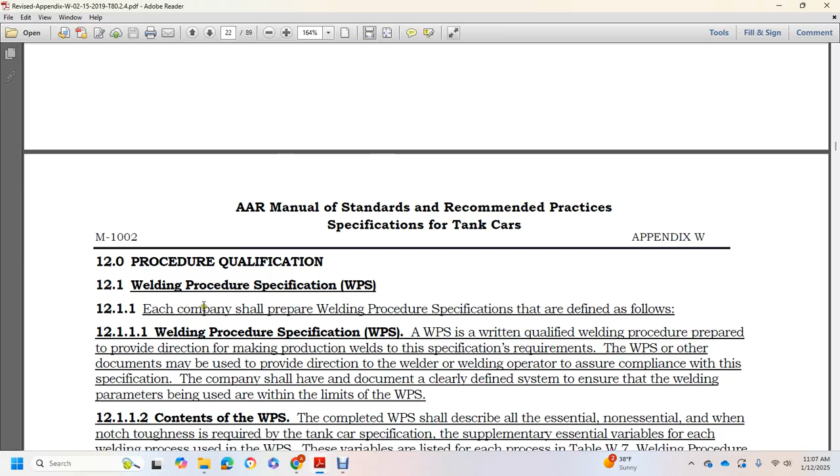AAR manual standard recommended practices specification of the tanker car's Appendix WM1002, procedure qualification, Chapter 12, welding procedure specification. Each company should prepare a welding procedure specification that defines the file for the welding procedure specification, written with a qualified welding procedure prepared to provide direction for production, meeting the specific requirements of the welding procedure specification. These documents may be approved to provide direction to the welding operator to ensure compliance with the specification.

The company should have a clearly defined document system to ensure the welding parameters being used are within the limits of the welding procedure specification. Content of the welding procedure specification: a completed welding procedure specification describes the essential and non-essential variables, with notch toughness required by the tanker car specification, supplementing essential variables for the welding process. The welding procedure specification variables are listed for each process in Table W7.

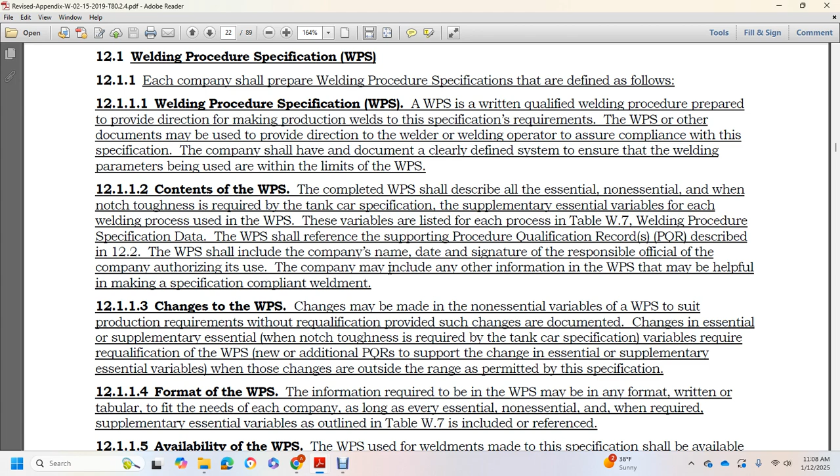The welding procedure specific data and welding procedure specification reference support the proper procedure qualification records described in 12.2. The welding procedure specification should include the company name, date, and signature of the responsible official authorizing its use. The company may include any other information in the welding procedure specification that may be helpful for making specification-compliant weldments.

Change of the welding procedure specification: changes made to the non-essential variables of the welding performance specification suit the production requirement without requalification. Provide a document change with essential and supplemental essential variables, including notch toughness required by the tanker car specification. Variables requiring requalification of the welding procedure specification, additional to the procedure qualification records, should support the change of essential or supplementary essential variables when those change outside the range permitted by the specification.

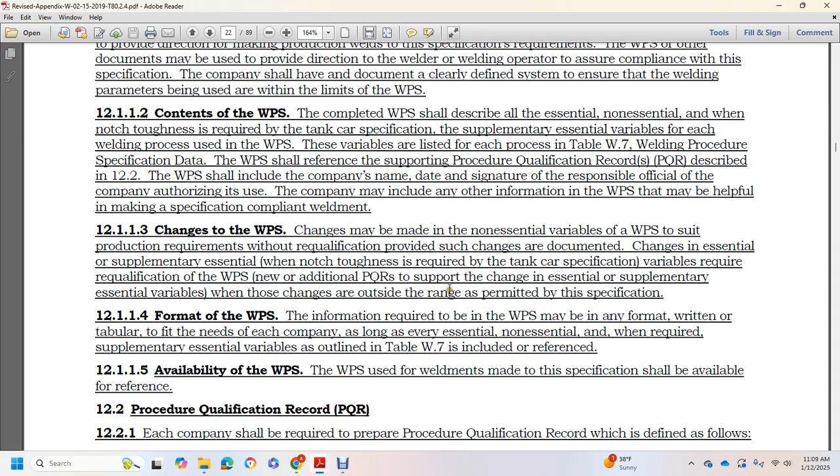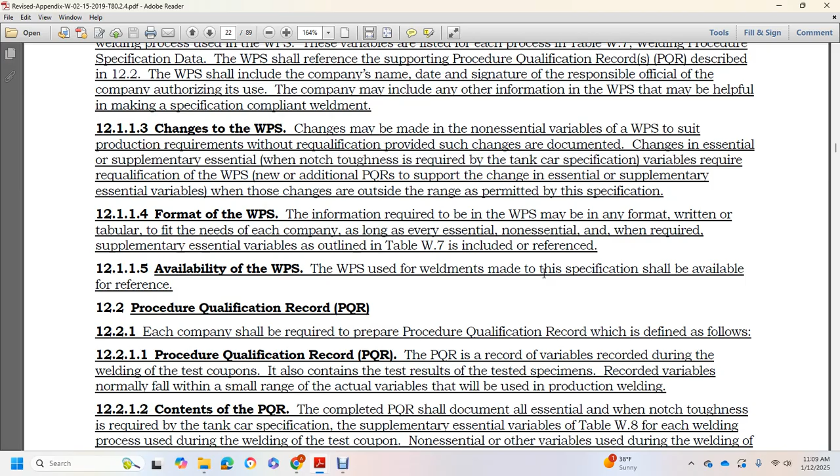Format of the welding procedure specification: information required in the welding procedure specification may be in a format written tabular to the needs of each company, as long as every essential and non-essential, and when required, supplemental essential variable outlined in table W7 is included as a reference. Availability of the welding procedure specification for the weldment made to specification should be available as a performance reference, and the procedure qualification record.

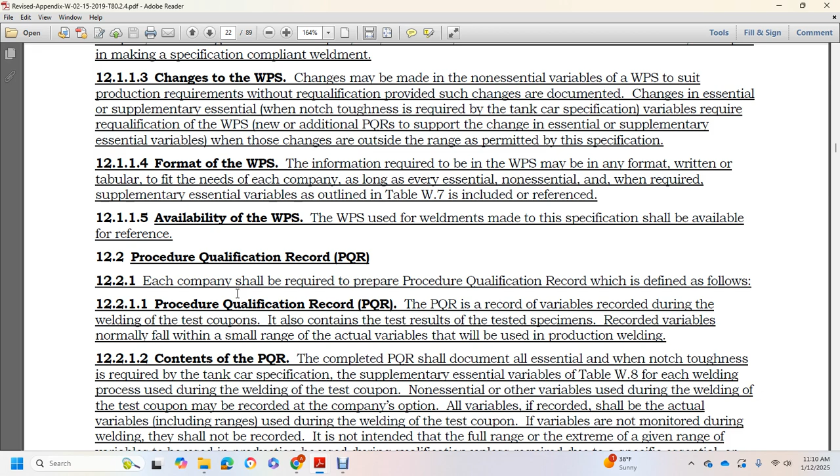Each company should be required to prepare a qualified procedure qualification record as defined and filed with the procedure qualification record. The procedure qualification record is the variables recorded during the welding of the test coupons, containing the test results of the test and specimen. Recorded variables normally fall within a small range of actual variables due to production. Content of the procedure qualification record:

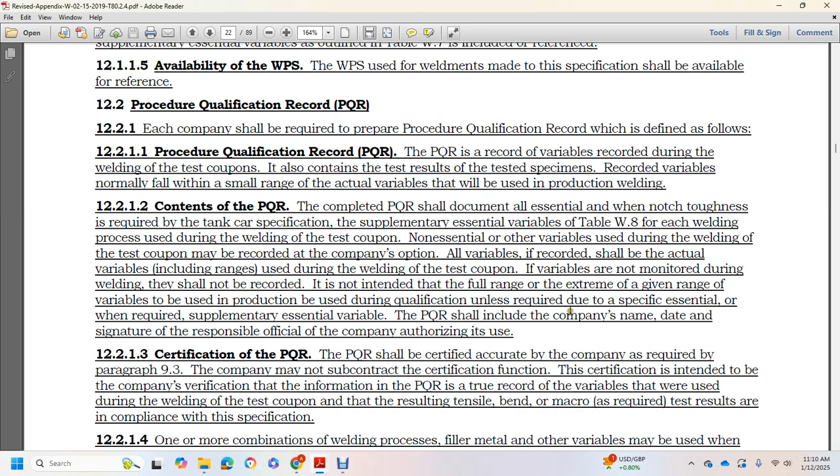The procedure qualification record shall include the company name, date, and signature of the responsible official authorizing its use. Certification of procedure qualification records.

The procedure qualification record accuracy is required by the company per paragraph 9.3; the company may not subcontract the certification function. Certification is intended to be the company's verification that the information in the procedure qualification record is a true record of the variables used during welding of the test coupon, and that resulting tensile, bending, and macro test results, as required, are in compliance with the specification.

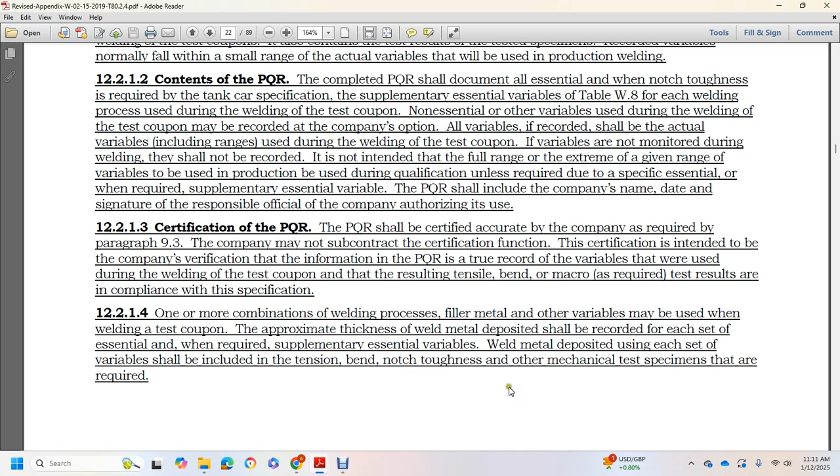One or more combinations of welding process, filler metal, and other variables may be used when welding a test coupon. The approximate thickness of welded metal deposit should be recorded for each set of essential welding variables. Required essential and supplementary essential variables for weld metal deposit, using each set of variables, should include tension, bending, and notch toughness, and other mechanical test specimens as required.

Change of the procedure qualification record. Changes of the procedure qualification record are permitted except as described below. Editorial corrections to the addenda of the procedure qualification record are permitted, except for editorial correction of an incorrect base metal or filler metal number assigned.

As an example, the addendum would be changing the result of a change of specification. For instance, the specification may assign a new F-number to a filler metal, or adopt a new filler metal under an established F-number.

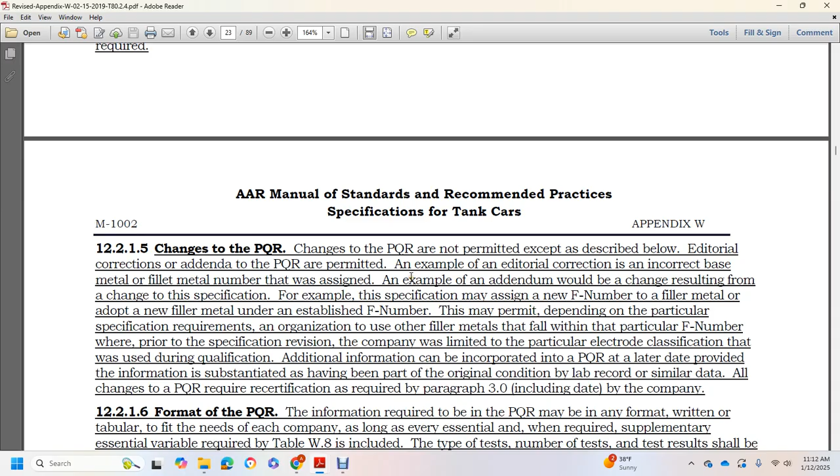This permits, depending on the particular specification requirements of the organization, use of the filler metal within the particular F-number when prior to the specification revision the company was limited to the particular electrode classification used during qualification.

Additional information incorporated into the procedure qualification record later must be verified as having been part of the original qualification record. Similarly, all the procedure qualification records required for recertification, as required in paragraph 3.0, including the date, must be supported.

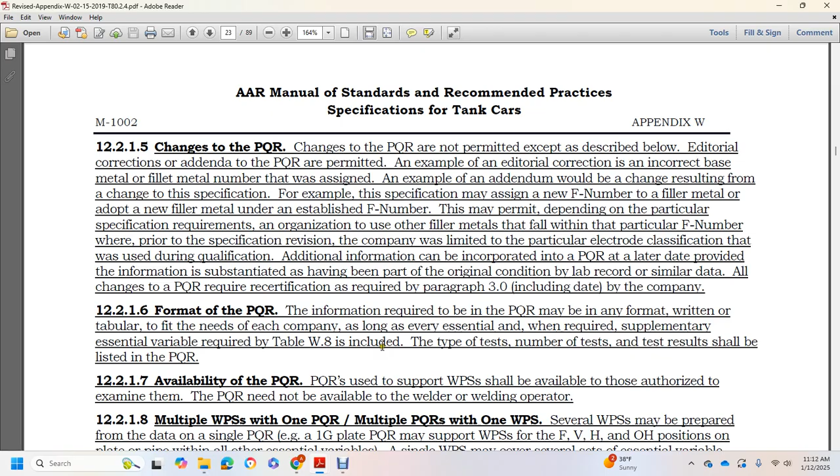The company may format the procedure qualification record information required, written in tabular form to suit the needs of the company, as long as every essential and, when required, supplemental essential variable in the table is included, along with the type of test and the number of test results, which shall be listed in the procedure qualification record.

Availability of the procedure qualification record used to support a welding performance specification must be available to those authorized to examine it. The procedure qualification record need not be available to the welder or welding operator.

Multiple welding performance specifications may be based on one procedure qualification record, and multiple procedure qualifications may support one welding procedure specification. Several welding procedure specifications may be prepared from data for a single procedure qualification record. One 1G plate procedure qualification may support a welding performance specification for flat, vertical, horizontal, and overhead positions on plate and pipe.

This applies along with all the other essential variables. A single welding performance specification may cover a range of essential variables, as long as the supporting procedure qualification record meets each essential, and when required, supplemental essential variable.

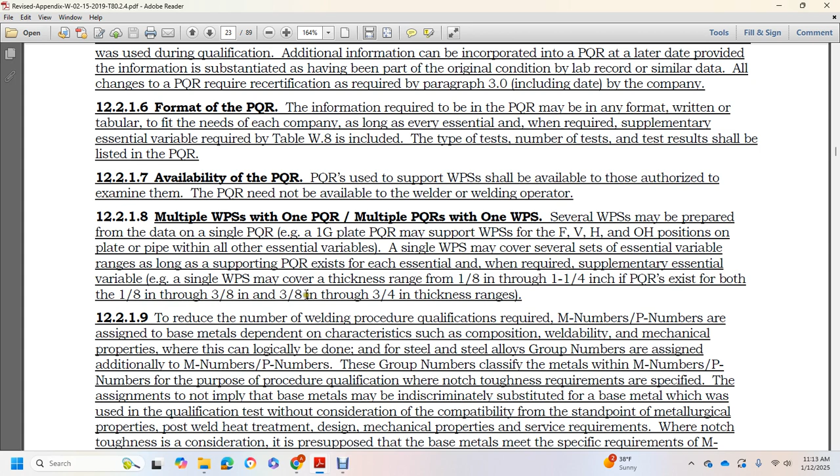A single welding performance specification may cover a thickness range from 1/8 inch to 1 1/4 inch if the procedure qualification record tests for both the 1/8 through 3/8 inch range and the 3/8 inch to 3/4 inch range.

The number of welding procedure qualifications required for the M-numbers and P-numbers are assigned based on the base metal, depending on characteristics such as composition, welding behavior, and mechanical properties, which are logically determined for steel and steel alloys.

Group numbers are assigned in addition to M-numbers and P-numbers. Group numbers classify metals within the M-number and P-number system for the purpose of procedure qualification.

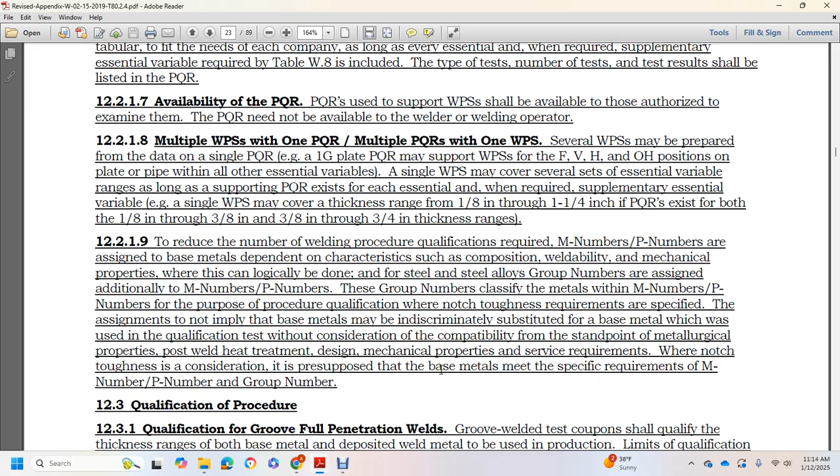Notch toughness requirements specified for these assignments apply to the base material, without indiscriminately substituting base material qualification test results, without consideration of compatibility standpoint, metallurgical properties, post-weld heat treatment, design mechanical properties, and service requirements within the notch toughness consideration, presupposing the base metal meets the specific requirements of the M-number, P-number, or group number for procedure qualification.

Qualification of groove full penetration welds: the groove weld test coupon shall qualify the thickness ranges of the base metal and the deposited weld metal to be used in production.

Limits of qualification shall conform to table W8. Welding performance specification qualification for groove welds should be made with a groove weld test plate using tension and guided bend specimens, and notch toughness testing when required by paragraph 12.3.5.

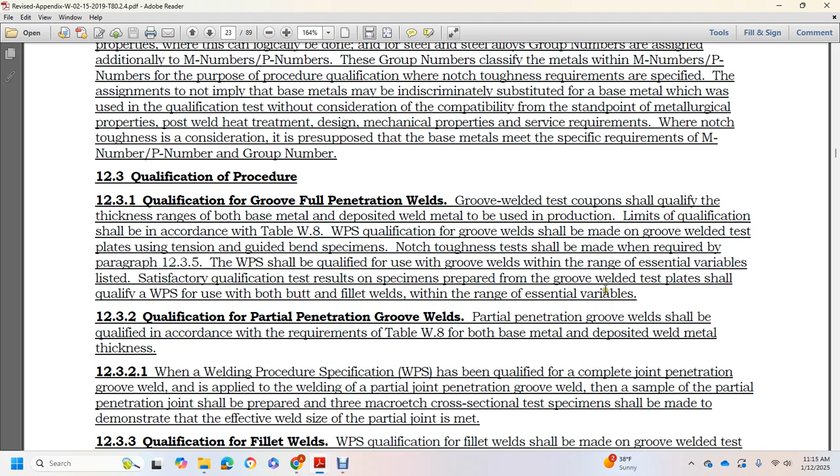Welding performance specifications should be qualified for groove welds with the range of essential variables listed. Satisfactory qualification test specimens prepared from the groove weld test plate shall qualify the welding performance specification for both butt and fillet welds within the range of essential variables.

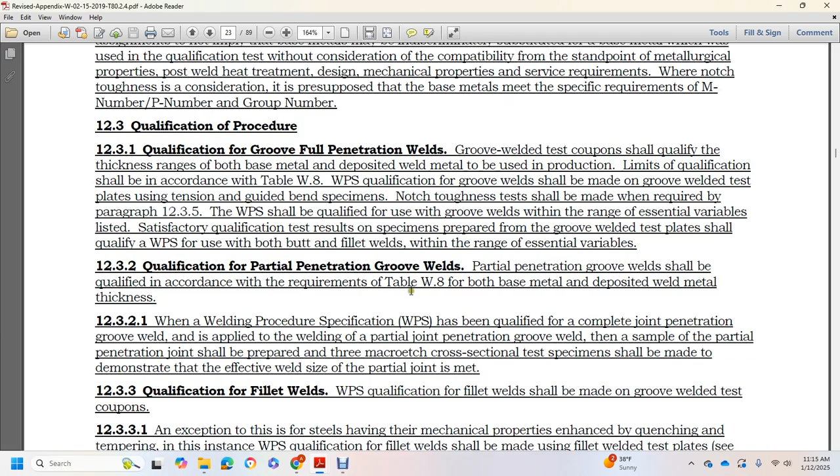Qualification of partial penetration groove welds: partial penetration groove welds shall be qualified in accordance with the requirements of table W8, based on the base metal and deposited weld metal thickness.

Per 12.3.2.1, a welding performance specification qualified for complete joint penetration groove welds may be applied to partial penetration groove welds. For the same partial penetration joint, three macro-etch cross-sectional test specimens should be made to demonstrate the effective weld size of the partial joint.

Qualification of fillet welds: welding performance specification qualification for fillet welds should be made using a groove weld test coupon, with exemption for steels having mechanical properties enhanced by quenching and tempering.

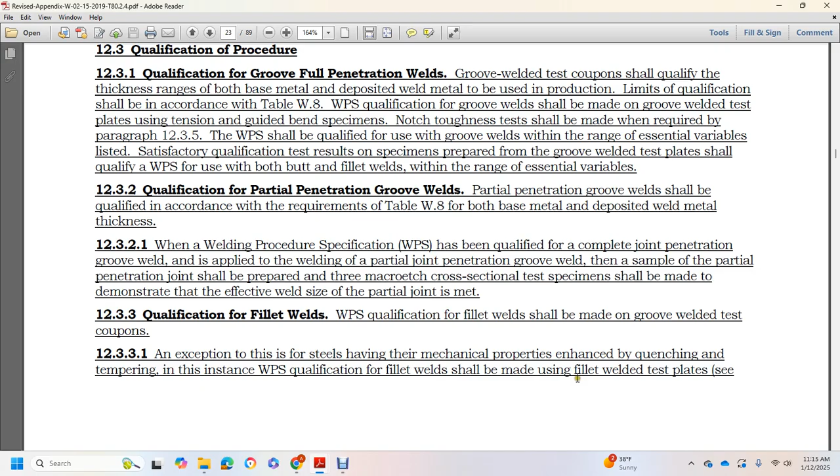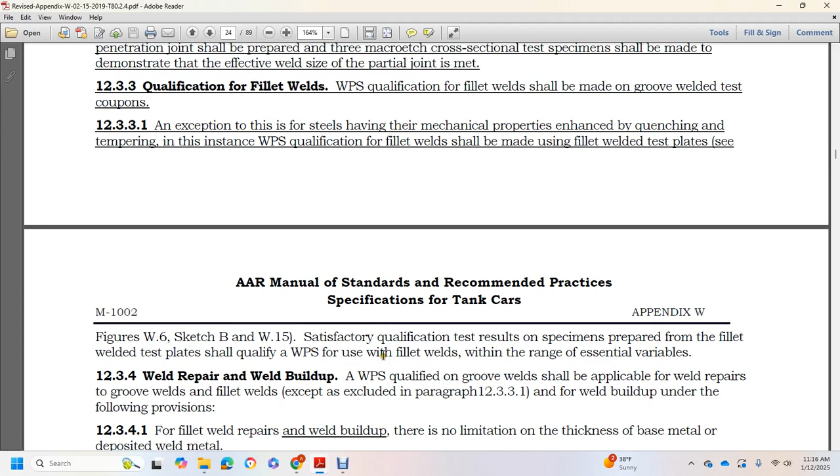For instance, welding performance specification qualification for fillet welds should be made using a fillet weld test plate, see figures W6, sketch B, and W15. Satisfactory qualification test specimens prepared from the fillet weld test plate shall qualify the welding performance specification for use of fillet welds within the range of essential variables.

Weld repair and weld build-up: a welding performance specification qualified for groove welds shall be applicable to weld repair using groove welds and fillet welds, except as excluded in chapter 12.3.3.1.

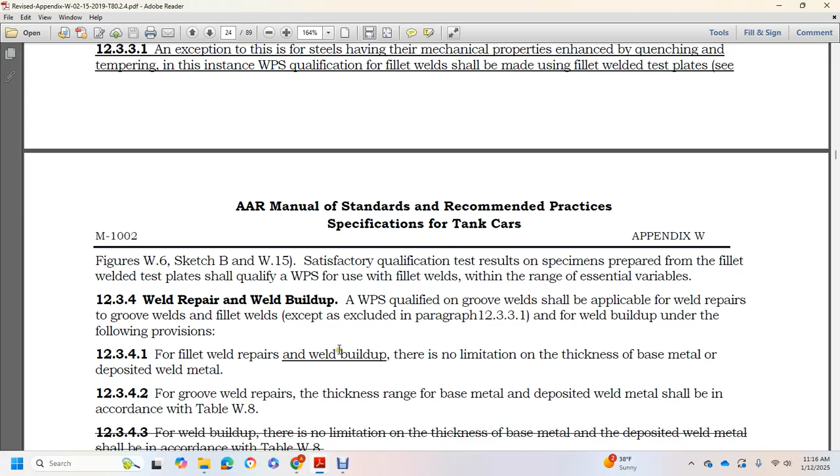For weld build-up under the following provisions, 12.3.4.1 covers fillet weld repairs and weld build-up with no limitation of thickness for base metal with the deposit of metal.

12.3.4.2 for groove weld repairs, the thickness range of the base metal with the deposit of weld metal should be in accordance with the table of W8. For weld build-up, there's no limitation of thickness; base metal and deposit of weld metal should be in accordance with the table of W8.

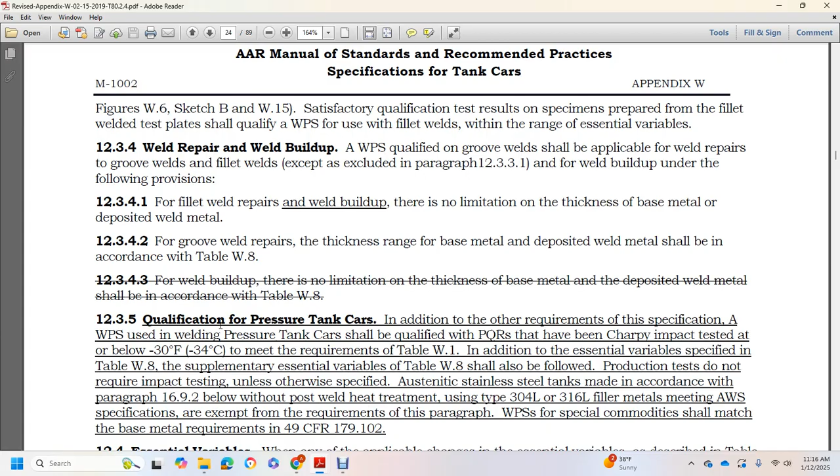Chapter 12.3.5, qualification of pressure tanks. In addition to the other requirements of the welding procedure specification, welding of pressure tanks is qualified with a procedure qualification record that has the Charpy impact test tested at or below negative 30 degrees Fahrenheit to meet the requirement of the table of W1.

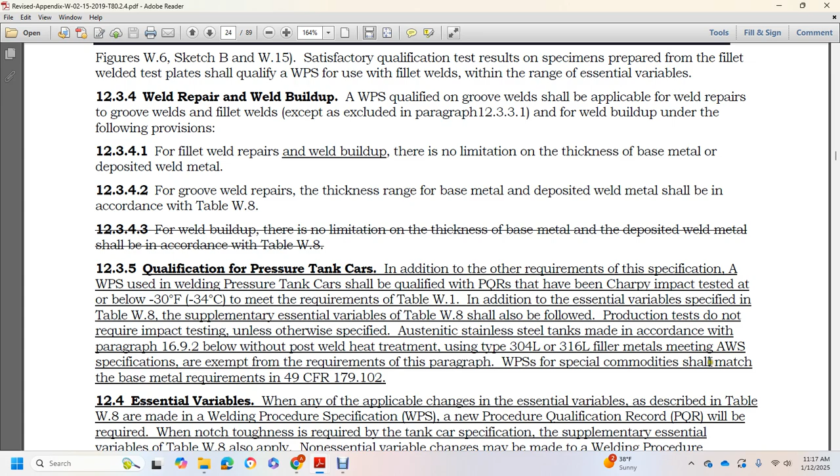12.4 Essential variable. When any of the applicable essential variables described in the table of W8 changes, or is made with the welding procedure specification, a new procedure qualification record will be required.

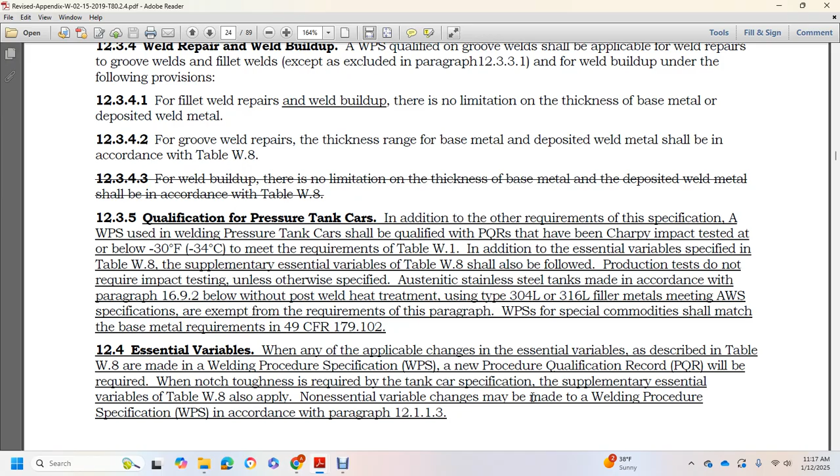Notch toughness required with the tank car specification supplementary essential variable in the table of W8 also applies to essential variable changes made with the welding procedure specification, according with 12.1.1.3.

12.5 Welding procedure specification data. The following matrix indicates welding data to be included in the welding procedure specification for the welding process. The welding procedure specification may be presented in any format, written or tabular, provided the data required for the matrix is included in paragraph W12.1.

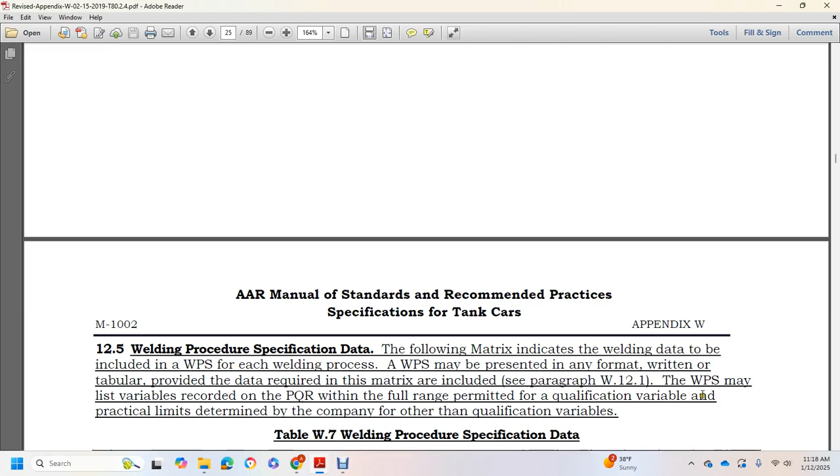The welding procedure specification lists variables of the procedure qualification record with the full range of permitted qualification variables; the practical limit is determined by the company for other than qualification variables. This is covered in the table of W7, the welding procedure specification data.

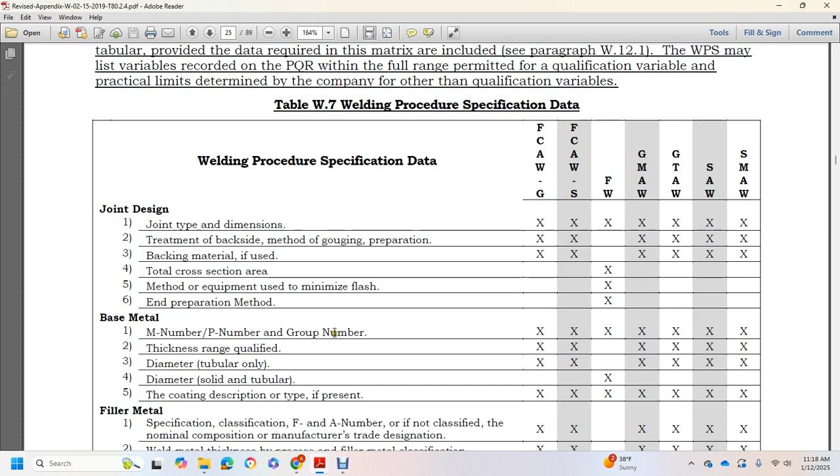We have the welding procedure specification, and to the right we have our different kinds of welding procedure types: joint design, joint type, dimension, treatment, backside, gouging, preparation, backing material if used, total cross-section area, method, equipment using minimum flash, end preparation method, base materials M and P number group, thickness range qualified,

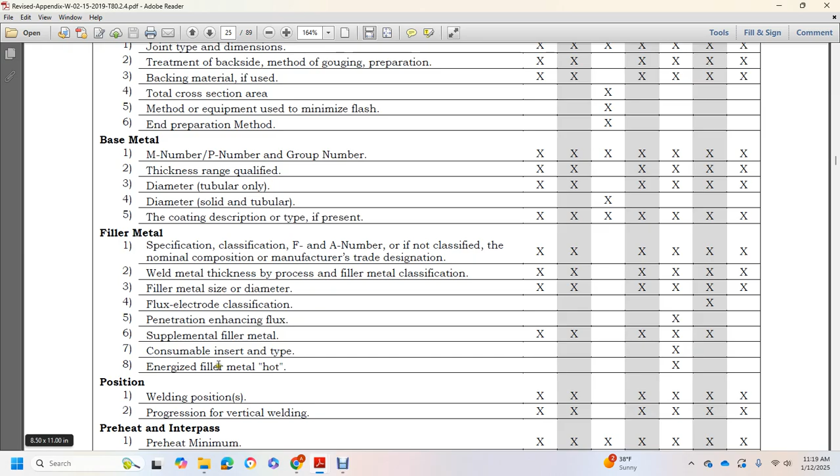diameter tubular only, diameter solid and tubular, coating description of the type present. Filler metal with the specification classification, F and A number, if not classified, nominal composition, manufacturer trade designation, metal thickness, process, filler metal classification, filler metal size with the diameter, flux electrode classification, penetration enhancing flux, supplemental filler metal, consumable insert, energized filler metal, hot wire, position, welding position, progression, vertical welding,

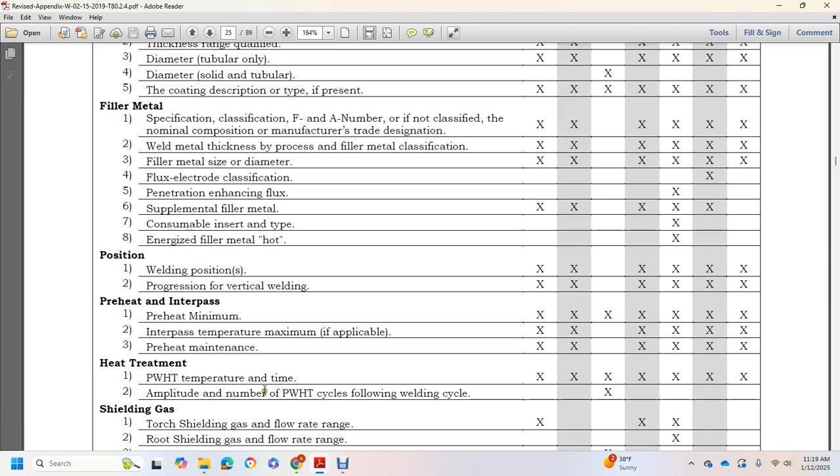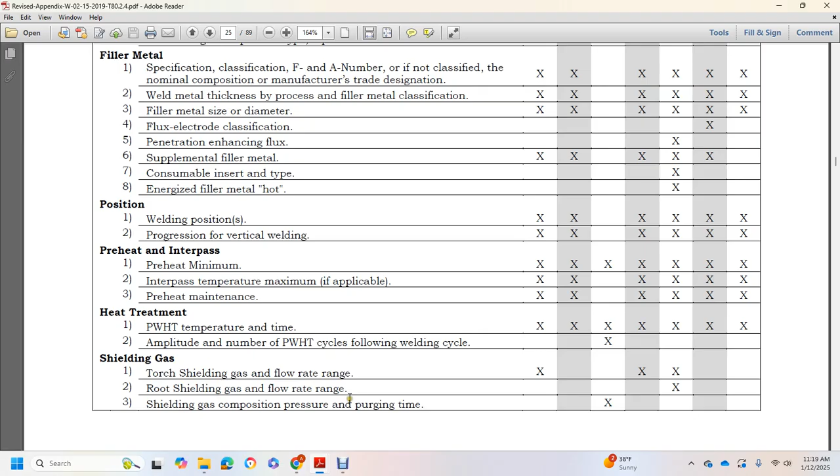preheating, interpass, preheat minimum, interpass temperature maximum if applicable, preheat maintenance, post-weld heat treatment temperature and time, amplitude and number of post-weld heat treatment cycles following welding cycle, shielding gas, torch shielding gas flow rate range, root shielding gas flow rate range, shielding gas composition, pressure and purging time,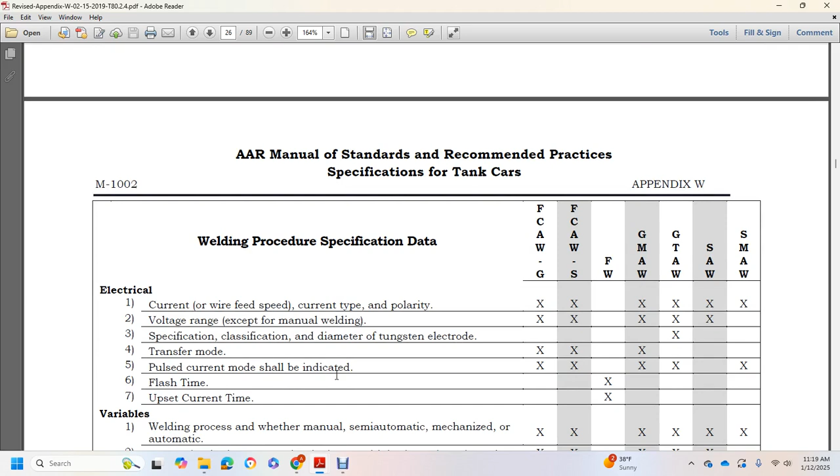electrical current over the wire feed speed, current type and polarity, voltage range except for manual welding, specification, classification, diameter tungsten electrode, transfer mode, pulsed current mode, shall be indicated flash time, upset current variables, welding process for manual, semi-automatic, mechanized, and automatic,

from mechanized and automatic: single and multiple electrode spacing, single or multiple pass, contact tube working distance, cleaning, peening, string or weave beads, travel speed with mechanized or automatic welding, manual application requiring heat input qualification, type of model and equipment, upset length of force, distance between clamping dies, preparation, clamping areas, clamping force, forward and reverse speeds, use of thermal processes.

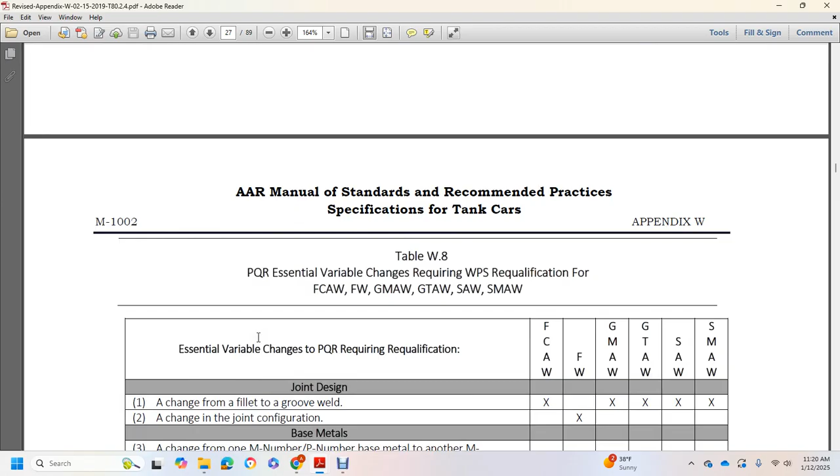Or it's still the same table: essential variable changes, procedure qualification record, requalification, joint design change, fillet to a groove weld, change from the joint configuration, base metal change from M number to P number to base metal with the M number, P number to base metal with the combination M number and P number base metal with the ASME Section 9 welding brazing fusing qualifications, P number to AWS B2.1 base metal grouping for welding procedure qualification.

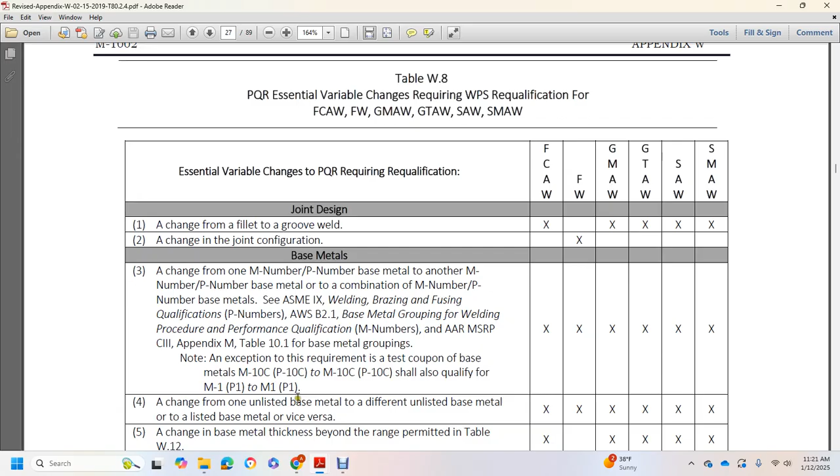M numbers, or AAR MSRP CIII, Appendix M, Table 10.1 base metal groupings, exception to the requirement of test coupon on base metal with M10C or P10C; to M10C, P10C, should also qualify with M1P1, M to M1P1, or change from unlisted base metal with a different unlisted base material a listed base material, vice versa.

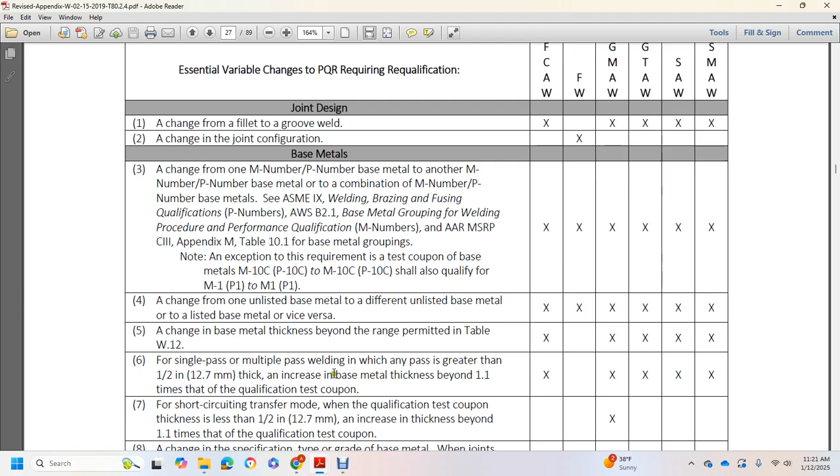Change the base metal thickness beyond the range permitted with Table W12. For single pass or multiple pass welding, any pass greater than 1/2 inch thick, increase the base metal thickness beyond 1.1 times the qualification test coupon.

For a short circuiting transfer mode, where the qualification test coupon thickness is less than 1/2 inch, increase the thickness beyond 1.1 times the qualification test coupon.

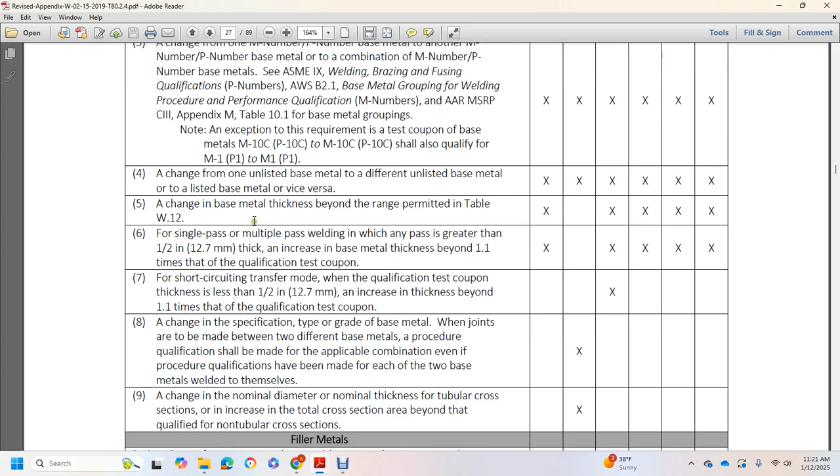Change the specification type or grade of the base metal, where joints are to be made between two different base metals. The procedure qualification should be made at the applicable combination, even if the procedure qualification has been made on each of the two base metals when welded to themselves.

A change in the nominal diameter or nominal thickness of the tubular cross-section, increasing the total cross-sectional area beyond the qualified non-tubular cross-section. Filler metals: a change in the F number of Table W9 or W11, or any F number filler metal to any filler metal not listed in Table W9 or W11.

For non-ferrous filler metal, change in the AWS classification shown in Table W11 to any other filler metal.

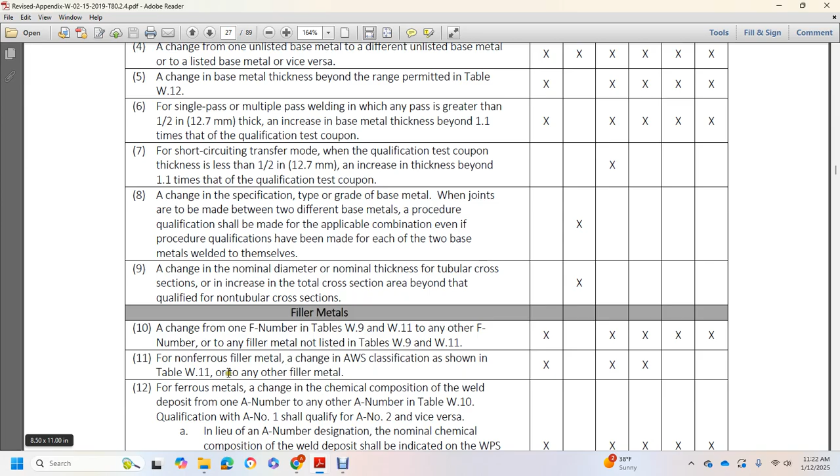For ferrous metal, change in chemical composition of the weld deposit, from one A number to any other A number. Per Table W10, qualification with A number 1 shall qualify A number for A number 2, and vice versa.

In lieu of A number designation, the nominal chemical composition of the weld deposit should be as indicated in the welding procedure specification, and on the procedure qualification record, designation of nominal chemical composition may also reference the AWS classification, except for the G suffix, manufacturer's trade designation, or other established procurement documents.

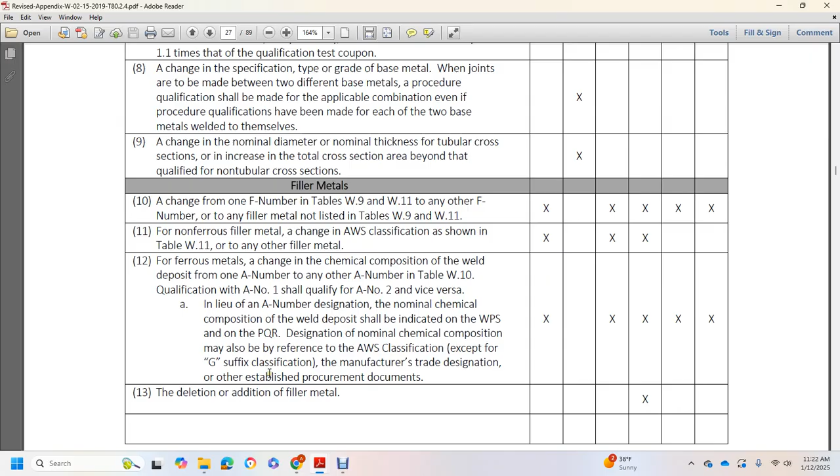13. Deletion of, and addition to, filler metal: a change in the filler metal product form, such as bare solid wire, metal core, flux-coated solid wire, or metal core powder.

When alloying of the weld metal is largely dependent on the composition of the flux used, any change in any part of the welding procedure would result in important alloying elements in the weld metal being outside the specific range of chemistry given in the welding procedure specification.

If there is evidence that production welds are not being made in accordance with the welding procedure specification, the inspector may require that a check be made of the chemical composition of the weld metal, such a check being preferably made on the production weld.

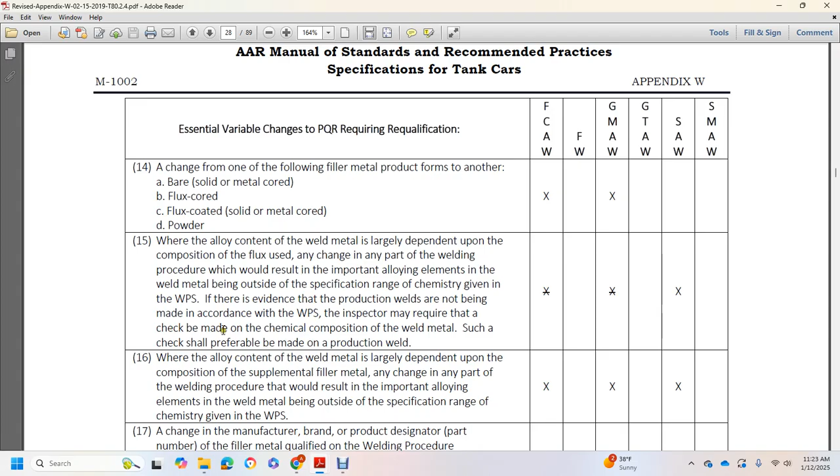Where the alloy content of the weld metal is largely dependent on the composition of a supplementary filler metal, any change in any part of the welding procedure would result in important alloying elements of the weld metal being outside the specific range of chemistry given in the welding procedure specification.

Change the manufacturer's brand or product-designated part number of the filler metal qualified, on the Welding Procedure Qualification Record when the electrode has a G classification to have a required tensile strength lower than that of the base metal.

The electrode does not have the AWS classification that defines chemical limits, change in indicator of the minimal tensile strength when a flux-wire combination is classified with an AWS specification.

Change in either the flux trade name or the wire trade name when neither the flux nor the wire is classified under AWS specification. Change flux trade name when the wire is classified under AWS specification but the flux is not. Flux trade name for A number 8.

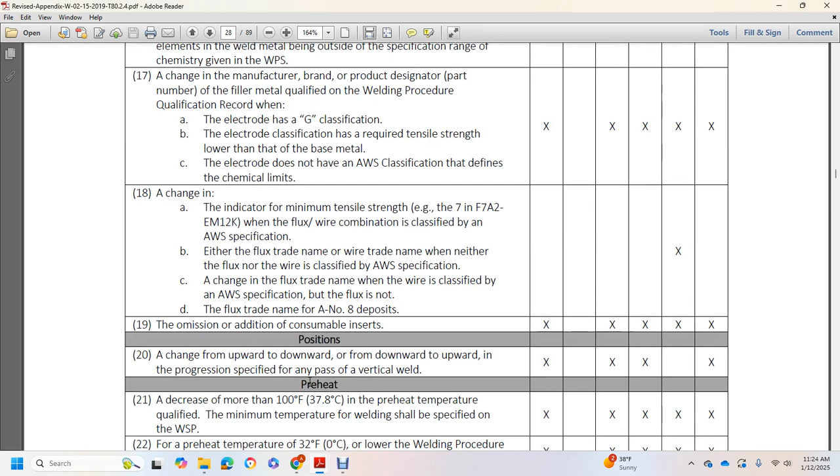Deletion or addition of consumable inserts. Each position change: upward to downward, or downward to upward, in progression specified for any pass of a vertical weld.

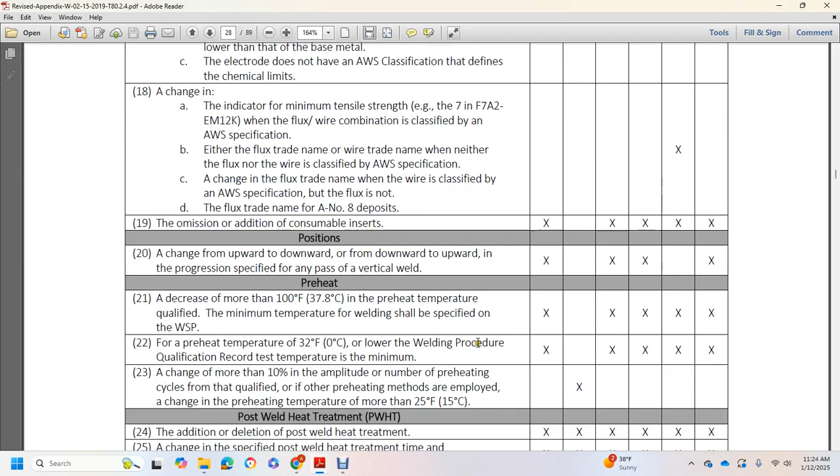Preheat, decrease of more than 100 degrees in preheat temperature. Qualify the minimum temperature for welding specified in the welding procedure specification. Preheat temperature of 32 degrees Fahrenheit or lower: the welding procedure qualification test temperature is the minimum.

Change more than 10% in the amplitude or number of the preheating cycles from that qualified, or if other preheating methods are employed, or a change in preheating temperature of more than 25 degrees Fahrenheit.

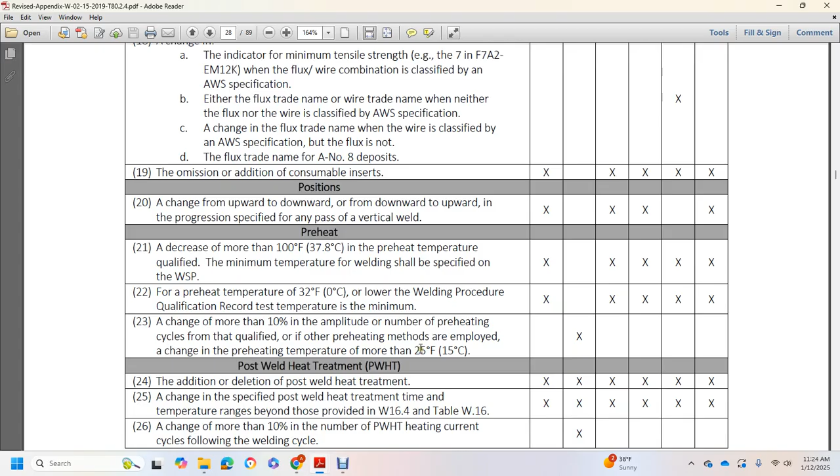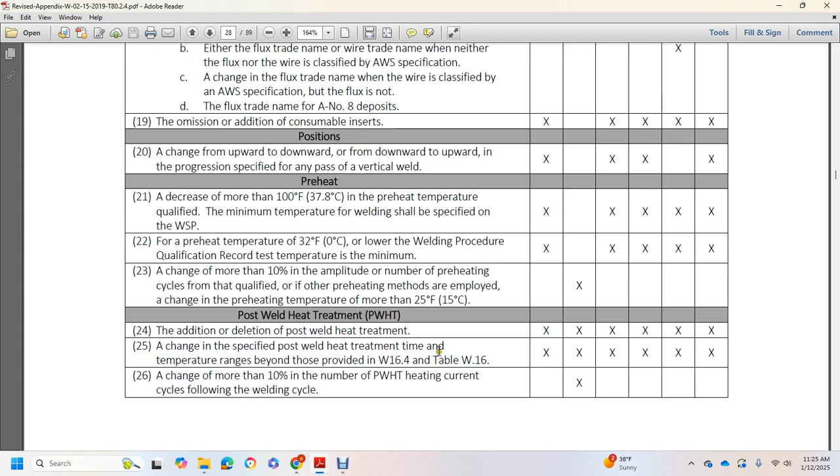Post-weld heat treatment: addition or deletion of post-weld heat treatment. Change 25: change of the specified post-weld heat treatment time, temperature ranges beyond those provided in W16.4 and Table W.16, or a change of more than 10% in the normal number of post-weld heat treatment heating cycles following the welding cycle.

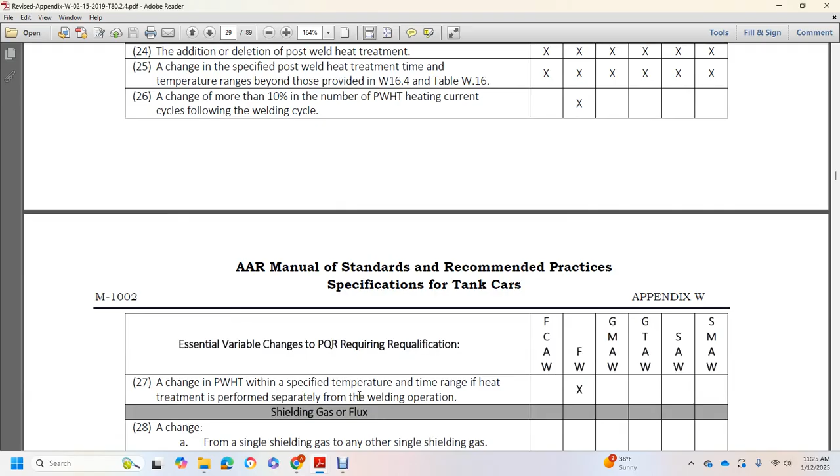A shielding gas mixture with an unspecified percentage composition, or a shielding gas mixture in addition to the omission of shielding gas. A change involving addition or deletion of backing gas, or the backing gas composition.

A change in the specified flow range of the backing gas. A change in flux involving either addition or deletion of material screened finer than 200 mesh, or 79 per 10 millimeters involving used or recrushed flux.

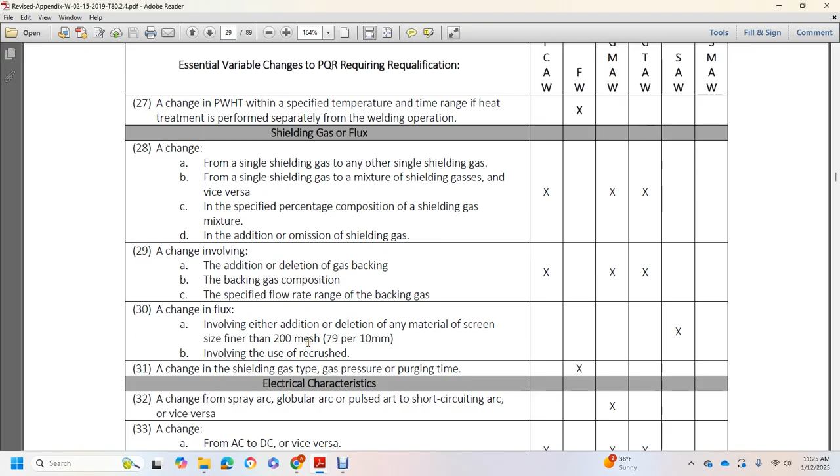31. A change in shielding gas type, gas pressure, or purging time.

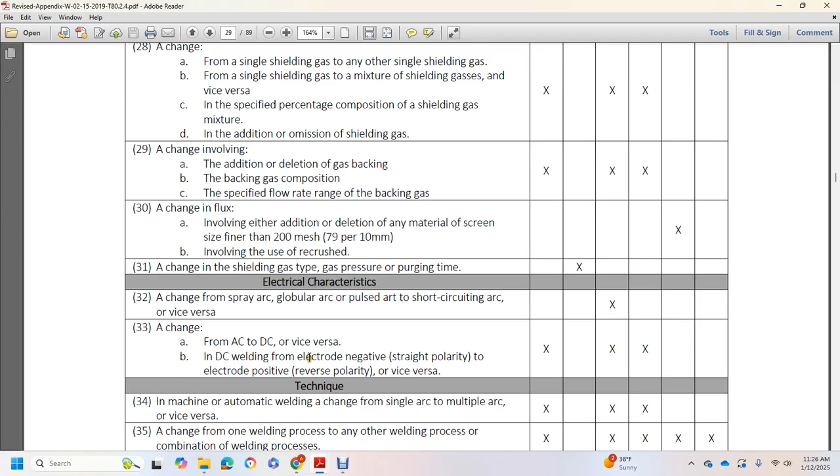Electrical characteristics: a change in spray arc, globular arc, or pulse arc, short circuiting arc or vice versa. Change from AC to DC or vice versa. For DC welding, a change from electrode negative (straight polarity) to electrode positive (reverse polarity), or vice versa.

Technique: machine or automatic welding, a change from single arc to multiple arc or vice versa. A change from one welding process to any other welding process, or to a combination of welding processes, and a change in method.

A change in upset length or force of more than 10%. A change in the distance between the clamping dies of more than 10%. Or a change in surface preparation of the clamping areas.

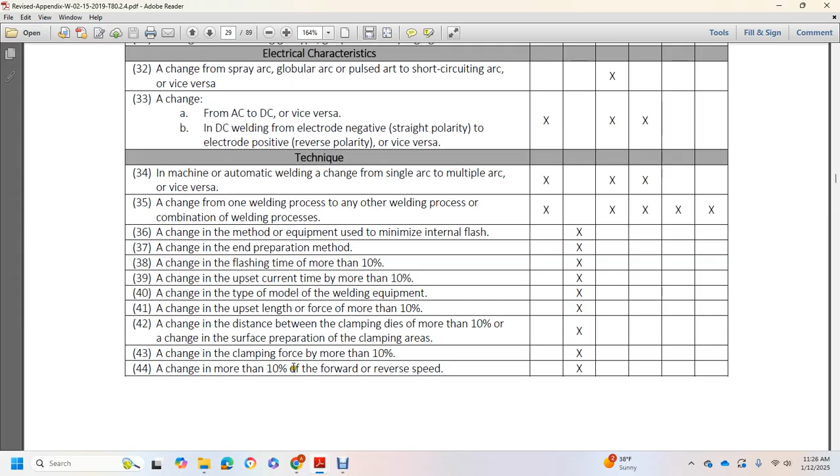43. A change in clamping force of more than 10%. 44. A change of more than 10% in the forward or reverse speed, as it relates to technique. 45. A change in joint design.

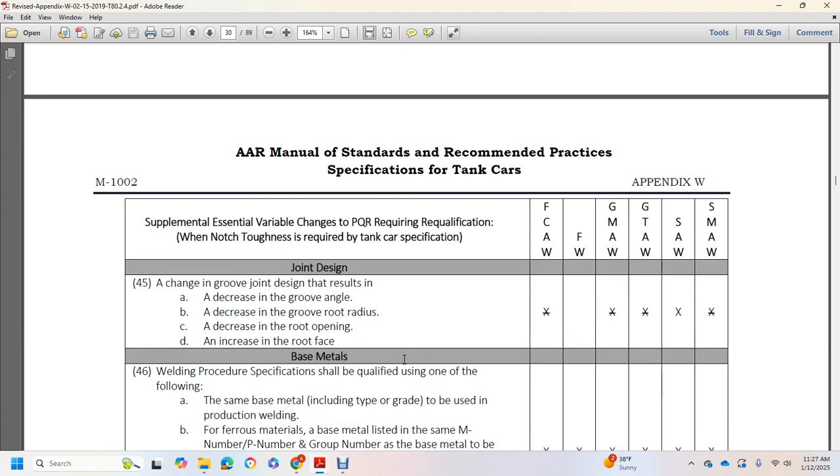A change in groove joint design resulting in a decreased groove angle, decreased groove root radius, decreased root opening, or increased root face. Base metal: the welding procedure specification shall be qualified for one of the following: the same base metal, including the type or grade, to be used in the production weld.

Ferrous metal with the base metal listed in the same M and P number, or group number, as the base metal to be used in production welding.

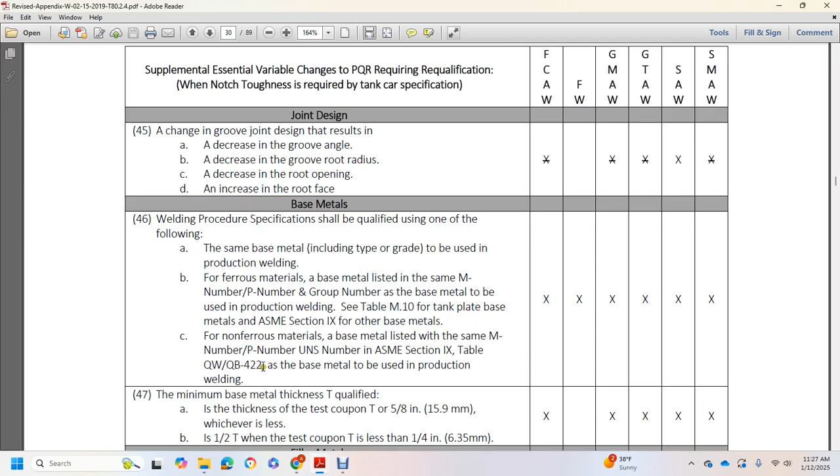For non-ferrous base metals listed in the same M number and P number, or UNS number, per the ASME Section IX table QW-QB-422, the base metal is to be used in production welding.

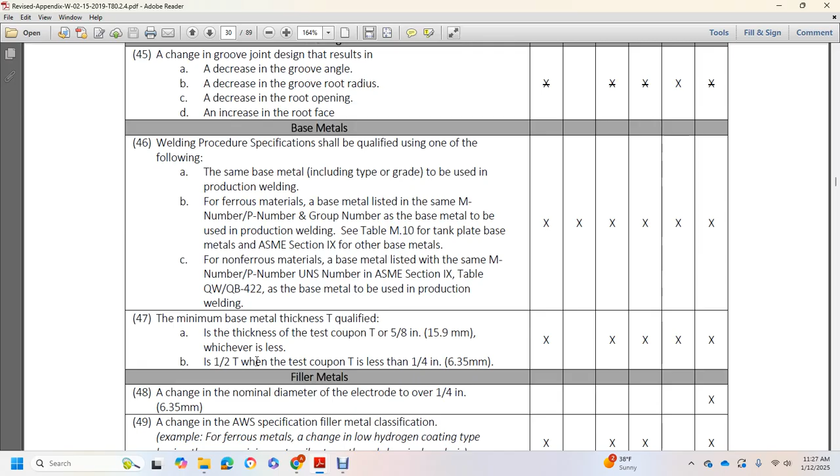Minimum base metal thickness T: the minimum thickness of plate is the test coupon thickness, or 5/8 of an inch, whichever is less; or half the thickness of the thinner base metal, when the test coupon thickness is less than 1/4 of an inch.

Filler metals: a change in the nominal diameter of the electrode over 1/4 of an inch. A change in the AWS specification or filler metal classification.

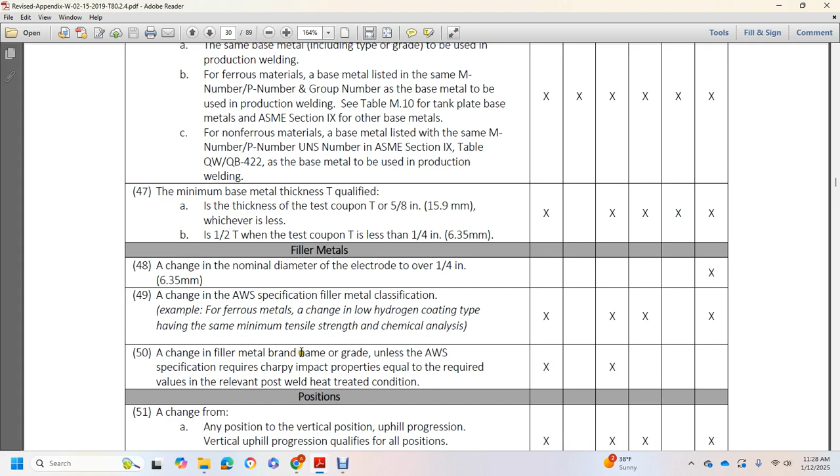For example, for ferrous metal, a change in low hydrogen coating type with the same minimum tensile strength and chemical analysis. A change in filler metal grade or brand name unless the AWS specification requires Charpy impact properties equal to the required value for the relevant post-weld heat-treated condition.

Position: a change from any position to vertical position with uphill progression; vertical uphill progression qualifies for all positions.

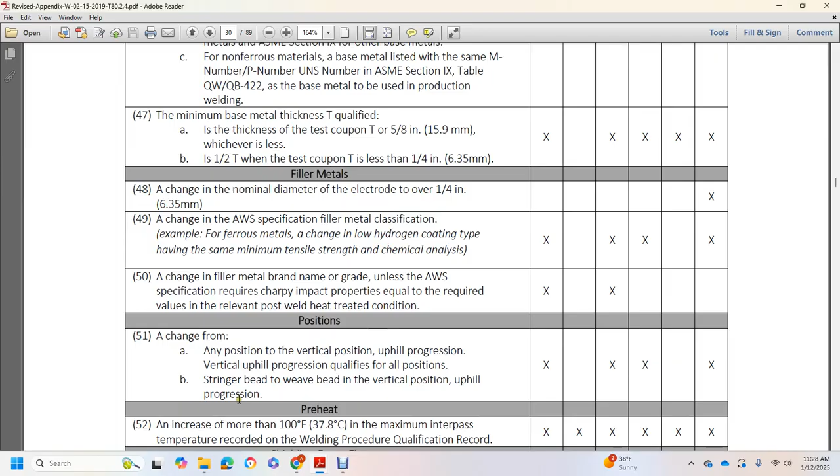A change from stringer bead to weave bead, or a change to vertical position with uphill progression. Preheat: an increase of more than 100 degrees Fahrenheit in the maximum interpass temperature recorded on the welding procedure qualification record. Shielding gas or flux: any change of flux brand with a classification designation.

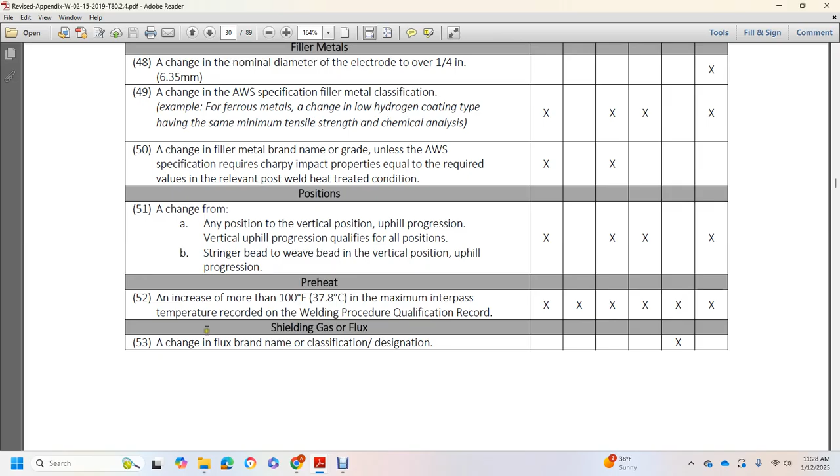A change in the type of current or polarity.

55. An increase in heat input, or an increase in the volume of weld metal deposited per unit length of weld. A change in the volume of weld metal means an increase in bead size with a decrease in the length of that weld bead per unit of electrode.

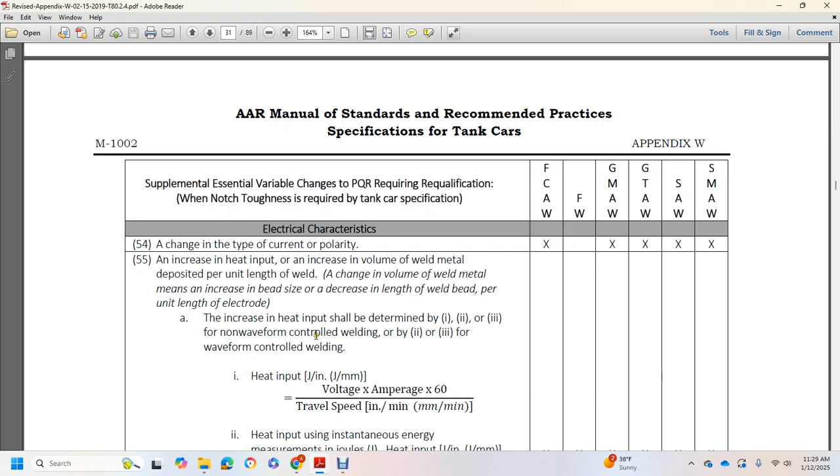Increase of the heat input should be determined by items 1, 2, or 3 for non-waveform controlled welding, or by 2 or 3 for waveform controlled welding. Heat input in joules per inch equals...

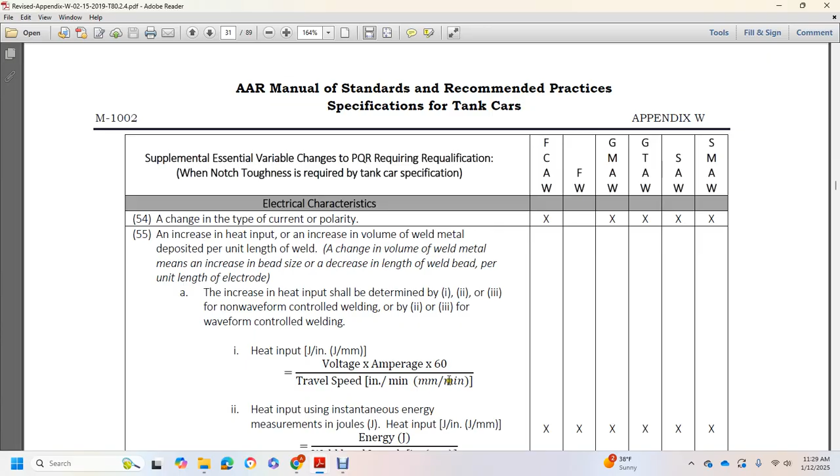Welding voltage in volts times amperes times 60, over the travel speed in inches per minute or millimeters per minute. Heat input using instantaneous, energy measured in joules, heat input in joules per inch. Joules equals energy in joules over the weld bead length in inches.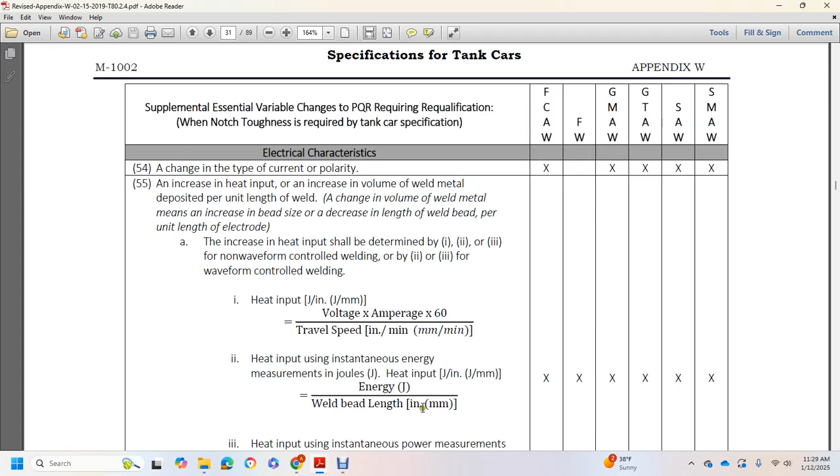Heat input using the instantaneous power measurement of joules per second or watts. Power in joules per second or watts, times arc time, over the weld bead length.

The requirement for measuring the heat input with the volume of the weld metal does not apply with the welding procedure specification qualified with the grain refining austenitizing heat treatment after welding.

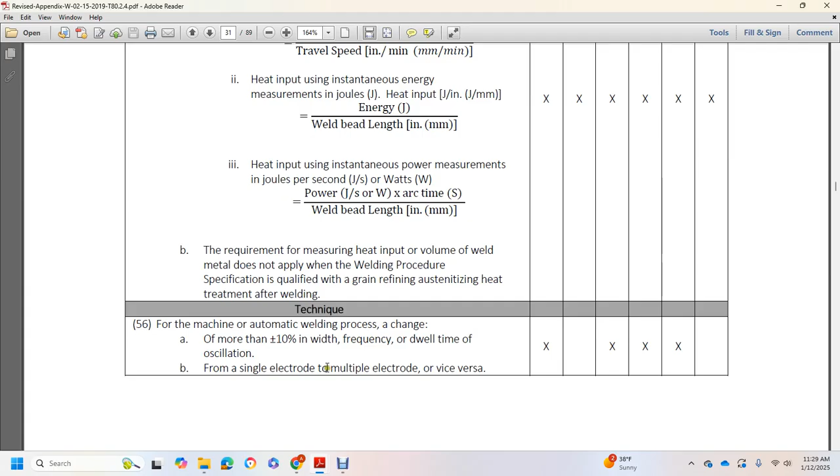Technique, for machine or automatic welding process changes with more than plus or minus 10% of the width, frequency, or dwell time of the oscillation. Also, change from single electrode to multiple electrode or vice versa.

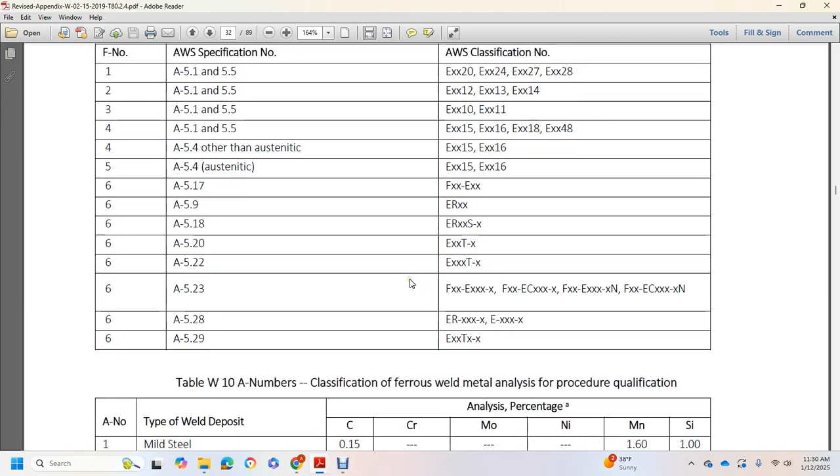Table W9 gives the AWS specification with a number for steel filler metal grouping for electrode and welding rod qualifications, type of welds, class for various welder qualification procedures, covering the different types of weld deposits and their chromium alloys.

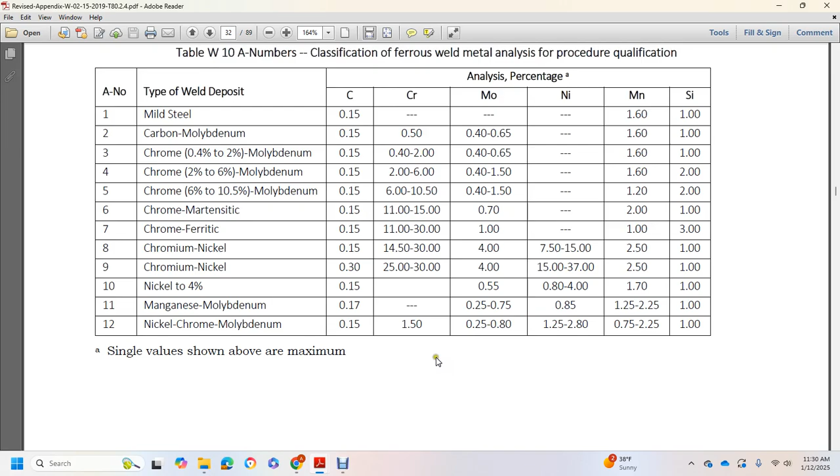W11 covers the number of non-ferrous metals grouping for electrode and welding rod qualifications.

Section 12.6, testing of the base material and filler metal with the welding procedure, complying with the applicable welding procedure specification. Information regarding essential and, when required, supplementary essential variables per 12.4 and table W8 above shall be recorded in the procedure qualification record prepared and qualified per figure W11.

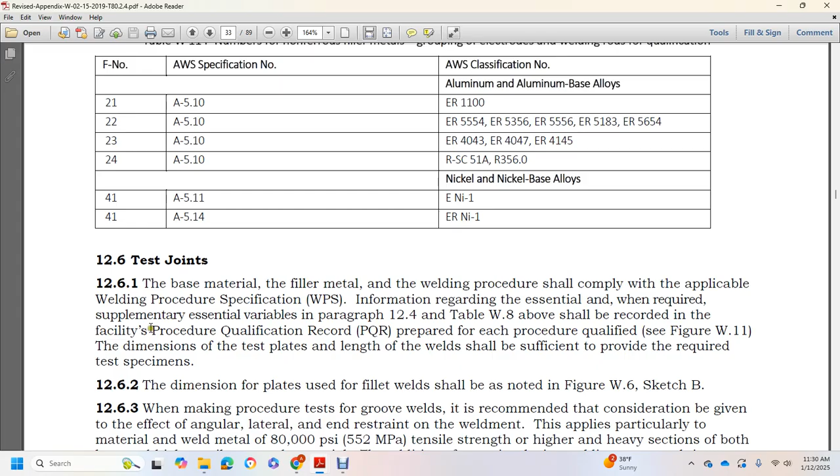Dimensions of the test plate and length of the weld should provide the position required for the test specimen. The dimensions of the plates for fillet welds should be noted in figure W6, sketch B.

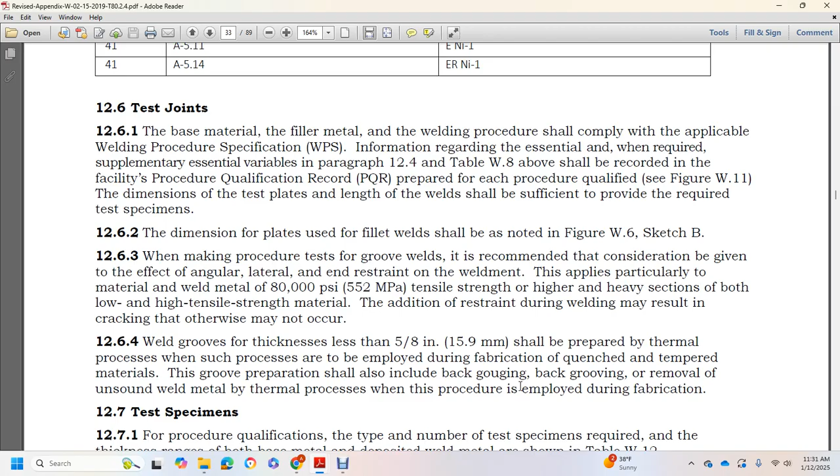Weld groove thickness less than 5/8 of an inch should be prepared with a thermal process. The test for the process employed during fabrication of quench and tempered material for the groove pattern preparation...

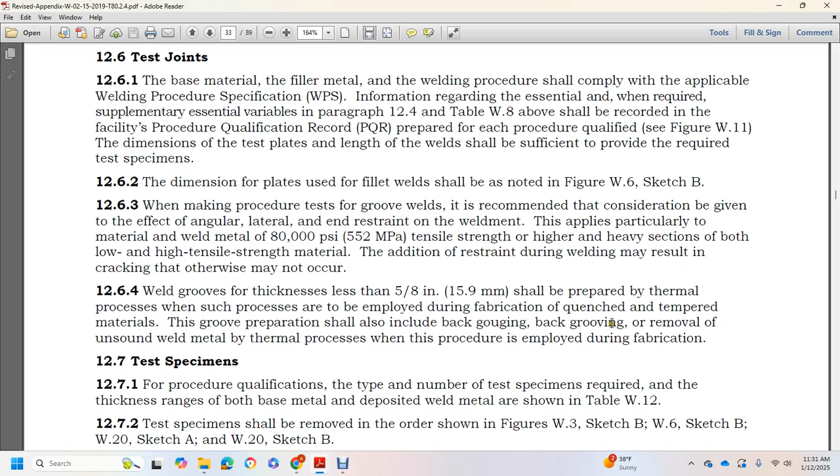...shall include back gouging, back grooving, and removal of unsound metal with the thermal process used during fabrication for the test specimen.

For procedure qualification, the type and number of test specimens required, with the thickness range of both base metal and deposited weld metal, is shown in table W12.

Test specimens shall be removed in the order shown in figure W3 sketch B, W6 sketch B, W20 sketch A, and W20 sketch B.

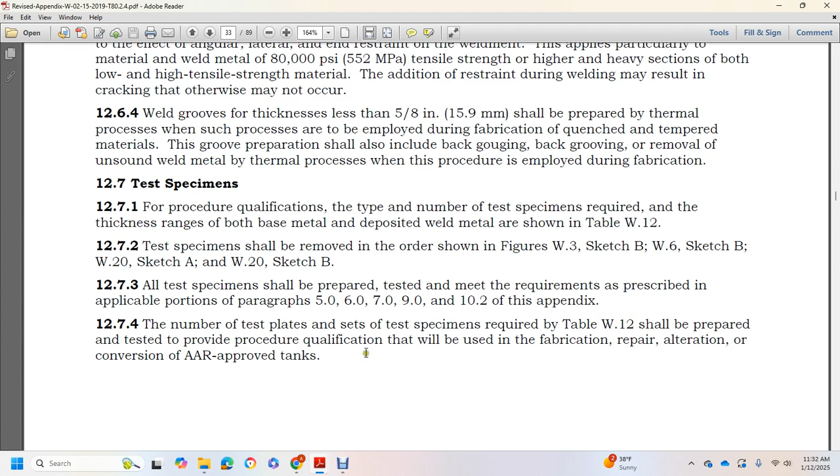Section 12.7.4: the number of test plates and sets of test specimens required in table W12 shall be prepared and tested to provide procedure qualification for fabrication, repair, alteration, or conversion of AAR-approved tanker cars.

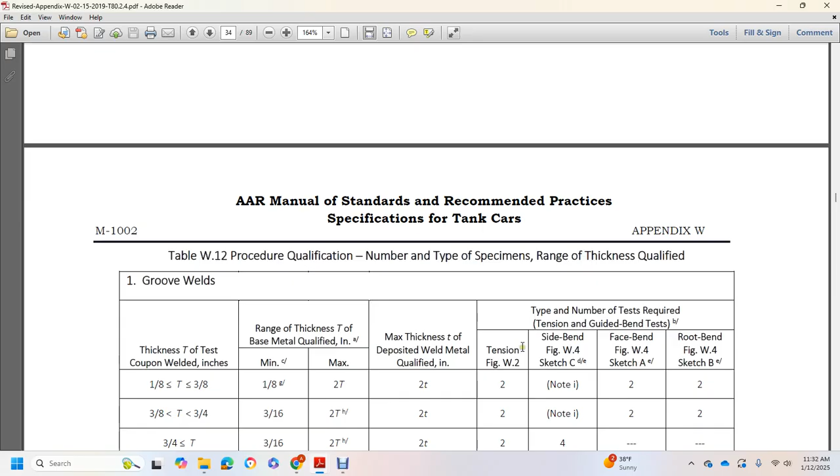Table W12, procedure qualification: number and type of specimens, thickness range to qualify, thickness of the thinnest member of the test coupon welded in inches, range of base metal thickness qualified, minimum and maximum range of deposited weld metal thickness qualified, tension, and the type and number of tests required.

Tension, side bend, face bend, root bend, fillet welds; thickness of the test coupon welded in inches, range of thickness minimum, maximum, unlimited; type and number of tests required: tension, guided-bend test, and fillet weld T-joint, with a value of 5.

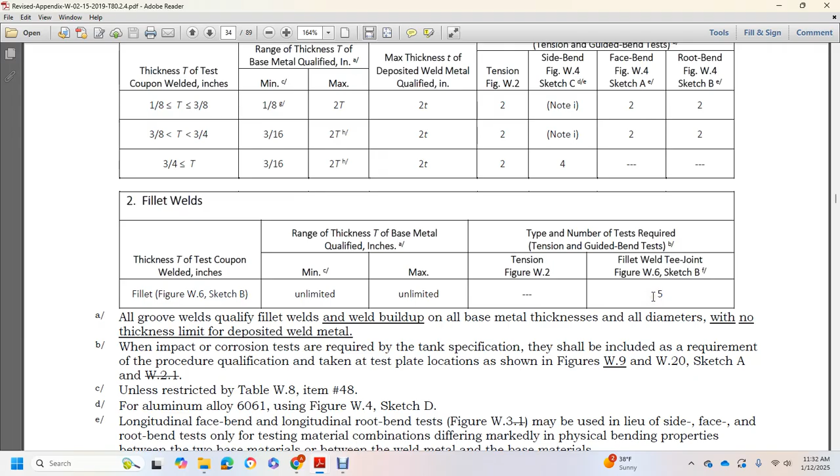Section 12.8, retest. When one or more of the test specimens in table W12 fail to meet the requirements, a retest may be conducted under the following conditions.

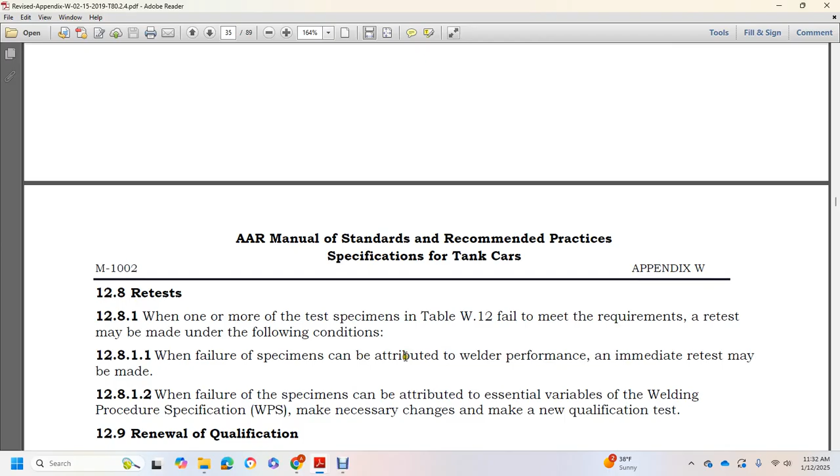When the failure of the specimen is attributed to welder performance, an immediate retest may be made. When the failure is attributed to an essential variable of the welding procedure specification, make the necessary change and conduct a new qualification test.

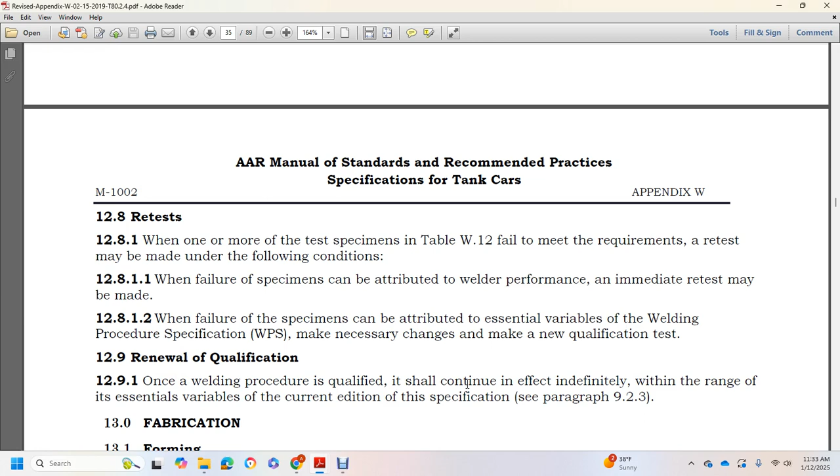Section 12.9, renewal of qualification. Once the welding procedure is qualified, it shall continue indefinitely, within the range of the essential variables of the current edition of the specification. Chapter 13, fabrication.